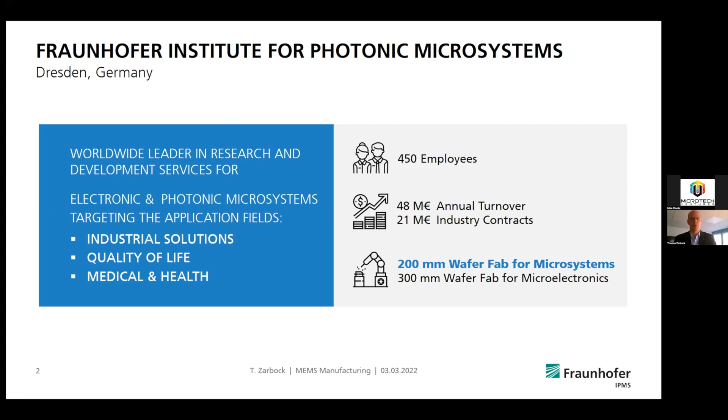Besides a 300 millimeter wafer fab for microelectronics, we do have a 200 millimeter wafer fab for microsystems, specifically for photonic MEMS. This is the focus I'm going to take into my talk today.

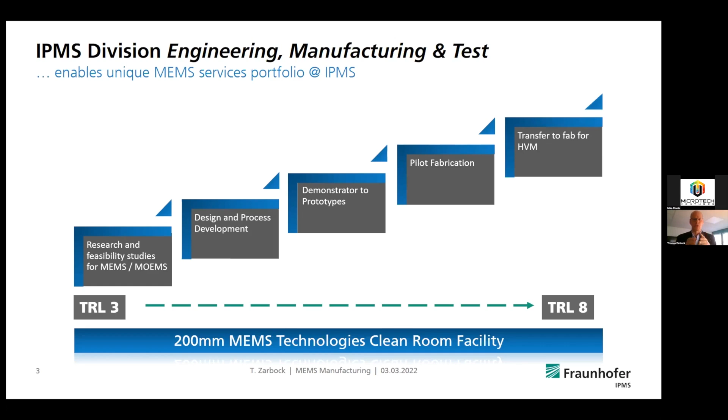Our business model that we are supporting is basically going from TRL level 3 up to 8. So we usually have opportunities to support customers starting from research and feasibility studies, going through design and process development, demonstrator and prototypes, pilot fabrication, and also helping customers transfer to a high volume manufacturing foundry fab, for instance. It's also possible for customers not to start from the left—they can get in somewhere in between if it's feasible. So we are very flexible on that approach.

A very brief overview of our key technology pools. We have surface micromachining that enables us to support micro-mirror arrays and CMUTs. We have bulk micromachining that we use for microspeakers and scanning micromirrors. And we are very strong in MEMS on CMOS integration, enabling us to do, for instance, thermopile arrays or micro-mirror arrays. Here are some nice pictures for impressions.

I'm not going to stick too much to that level here, because yesterday you heard the talk of my colleague Christoph Hohle regarding MEMS-based SLMs, spatial light modulators for holography applications. So, as I said, I'm going more into the manufacturing management perspective today.

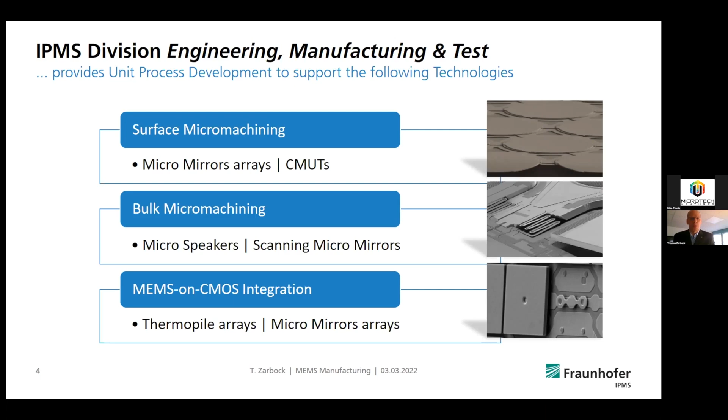This leads me to our clean room. I think Christoph has shown pretty much the same slide yesterday already, so I want to make this very brief. Everyone can read the details afterwards if he or she wants to.

But the focus here is that we are running a low volume and high mix clean room. Importantly, in lithography we are now flexible between i-line and even up to DUV, which is nice for an R&D MEMS facility. We are qualified by ISO 9001, and we also have an integrated MES system that helps us go for KPIs, measure our line performance, and improve it to the benefit of our customers.

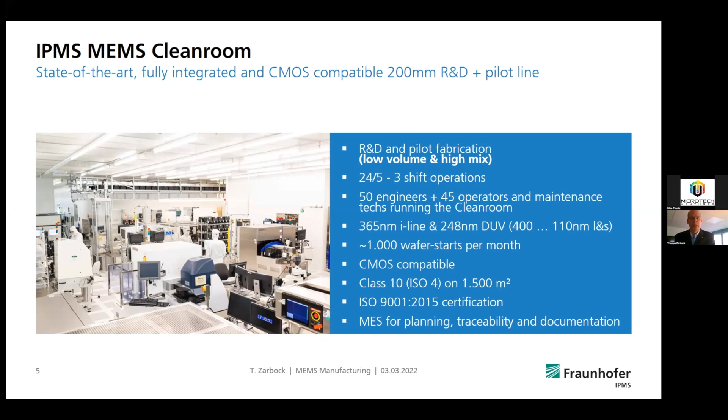Now, before I go into the deep dive of how we manage our clean room, I'd like to give a brief overview of semiconductor fab setups and characteristics. For that, I've chosen typical criteria like the modus operandi of a fab, the number of products in a fab, the number of equipment in a process area, key personnel, and variability—meaning how much variance you have in your processes and fluctuations inside the facility. This comes along with the number of products, and the speed resulting from that, which we call the X factor.

X means X times your theoretical cycle time—if you never had any waiting time in front of tools, if all tools never went down or had issues—and the number of wafer starts per year. These are typical key measures that characterize several fab setups. Talking about these, of course there are so-called high volume and low mix fabs. One example everyone knows would be Intel. So high volume and low mix fabs are characterized...

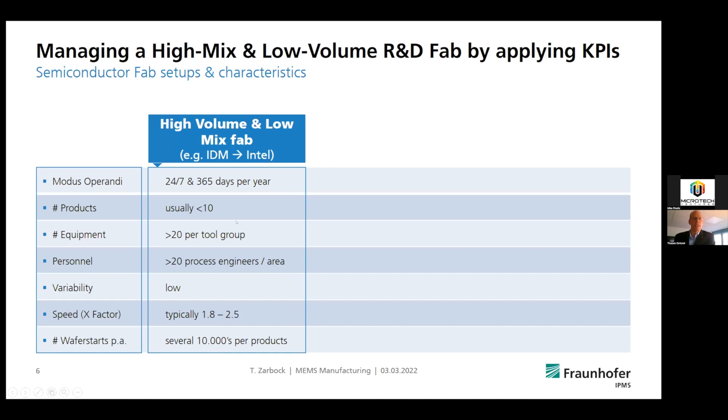They are running basically all through the year. Usually they don't have so many products in their line, maybe below 10. On the other side, they have quite a lot of equipment per tool group. Let's say oxide etchers, maybe 20 and more for that type. They have maybe 20 and more process engineers per area, like for instance, for dry etching.

Their variability out of the smaller number of products is usually low, which is resulting in a very high speed, so short cycle times, typically 1.8 to 2.5 X factor. And of course, for every product they are running, they are doing several 10,000 wafer starts a year, which is a high loading, high volume perspective.

On the other side, there are high volume, high mix fabs, for instance, foundry fabs like GlobalFoundries. Of course, they're also running 24/365. They might have more products in the line, maybe somewhere between 20, 50, and maybe even more. On the tool side, maybe not as many as a high volume fab with low mix. Process engineers, maybe also somewhat smaller number of people per process area.

The variability coming out of the higher product mix might be medium, at a medium level. And the cycle time in terms of the flow factor is maybe somewhere in the range of 2.0 to 3.0, so somewhat slower. And wafer starts wise, they are somewhere with several 1000s per product per year.

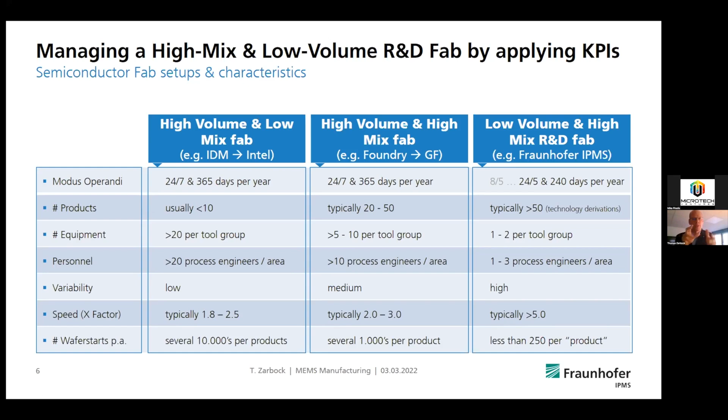And now I would like to deep dive into the right column and show you how we manage to be flexible, consider that cycle time is important and time to market as well, and try to define the sweet spot between the boundary conditions we are facing and still offer a good service to our customers.

The typical approach here is what we call our pyramid, which everybody knows. You have to follow through with cycle time and time to market. You have to offer good quality, which comes with good stability. You have to be flexible. Specifically, we consider flexibility out of our business model, ranging from TRL 3 to 8, and there is a cost perspective as well.

And out of this, you have conflicting goals, so you cannot optimize everything in perfect directions. You will have interactions between the figures, and you have to find the best point that you can serve. To do so, we set up different perspectives, measures and KPIs where we want to make sure that we can somehow handle that.

For instance, for on-time delivery, I will show you how we manage cycle time spread and what that is, and how we do our material flow management.

Process and technology, variability and stability are 2 things that are kind of also interfering. I think Christoph Hohle showed yesterday some insights into the MEMS-based SLMs for holography, what the efforts have to be.

I just took 2 examples here, like for instance deep silicon etching. We have 25 different processes with various differentiations in the depth of the etch step, the width and the profile, resulting in several hundreds of recipes that you have to run at the equipment and handle.

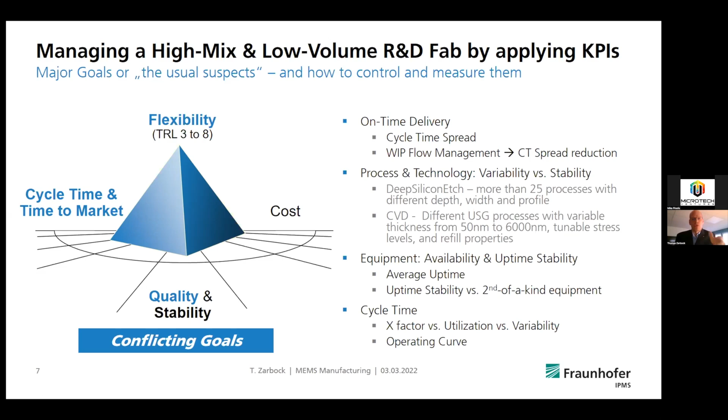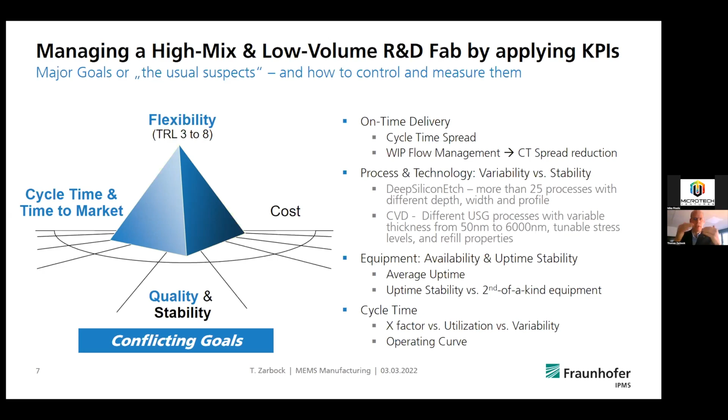And last but not least, when it comes to cycle time, I would like to show you in the end a model that handles the interdependency between your cycle time, the X factor, the utilization of your manufacturing facility, and the variability, the variance. And this is called the operating curve.

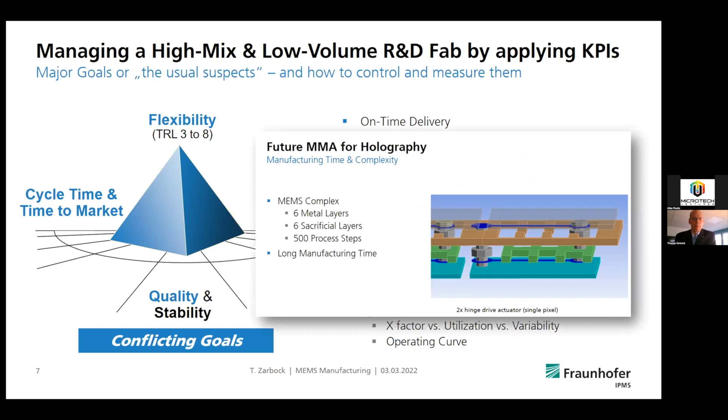So this is again the example from yesterday from my colleague, Mr. Hole, giving us the challenge with these spatial light modulators for holography, having 500 process steps and considerable long manufacturing time. How do we be able to still handle that? First is time to market.

So this is something that everybody might know. If you have a certain number of wafers you are running, you have cycle times. For every lot or wafer you get a cycle time, and you have an average cycle time for all the material, and then you have a distribution of your cycle time. And the distribution ideally is very tight around the average, and it's a normal distribution ideally.

And when you have this stable situation, you can give your customer a so-called on-time delivery. So you are able to say, with a certain probability, I can assume and assure that a lot of material is coming out at this point in time, and I can commit this to a customer. And then, of course, you have to hit this at least at 90%, maybe 95% on-time delivery.

And now the issue is, how do you handle the so-called cycle time spread? How much is your cycle time deviating beyond the 5th percentile and the 95th percentile? This part should be small out of your entire sample size. And this is something you should be able to control and manage.

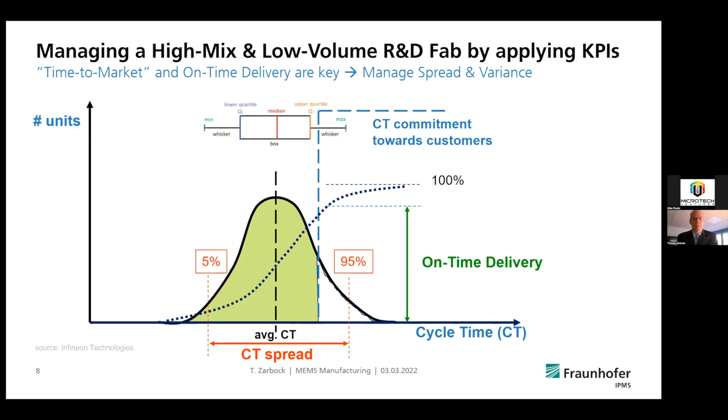How do we do that? We have decided to go for a so-called dispatch rule for our material flow management. So one example here, very general, is you have a process flow from one step to the last step, and you have a target cycle time for each step. And if you accumulate your target cycle time, you have a reference for all your lots and wafers running through the line. And at every point a material is being processed, you can see if it's either before the target cycle time, behind the target cycle time, or just on the target cycle time.

And our dispatch rule says at a certain operation, let's assume this one here, with 2 lots in front, the lot with the higher delay against the target will be handled first. And the idea is that if you do so, in the end you can manage to get your lots out as planned.

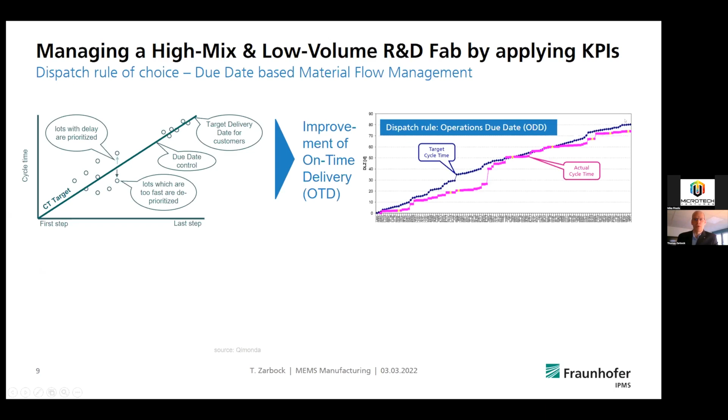Just to give you an example, here is a process flow with 150 process steps for a pressure sensor. You see the blue reference line, the accumulated cycle time across all the steps. And by our dispatch rule, we have been able to get the real lot with the actual cycle time out in time. And this is as it should be.

And the other thing you can do with this approach is you can maybe also define different target cycle times for different products, maybe also for different projects, or maybe also for different customers. And if you are able to steer this, you might then also be able to say, for a certain customer who is willing to pay some extra money for accelerating a process flow, we can then...

This is the same product behind, it's the same pressure sensor lot, it's a different one with the same flow, so to speak. We put it on hot lot priority, and with this, the lot has been able to run at almost 1/3 of the cycle time here, and it was still following very much the target that we put in the system. So this is something we can use to steer as we have planned, and make sure on-time delivery is at a high level.

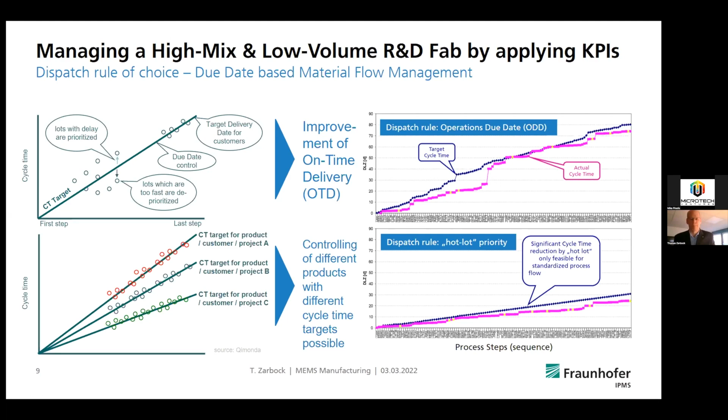So now this is another example I want to show you from previous actual data. You see here a lot that has been traveled across 150 process steps. You see again the target cycle time, planned target cycle time, and the actual cycle time.

So what happened? The lot has been started later in time as planned. There was an issue behind, and we put it on acceleration mode, so hot lot status. And as you see, it was able to pretty much run very fast, being handled first at every tool. And as we have seen, it's covering up its target cycle time. We put it back on normal level.

So here was the acceleration phase with hot lot. And then in the end, it was running at normal speed with the due date based rule. And it was pretty much still coming out as intended. So that's how it should be. This is how material should be coming out of the line. And this was running as intended.

Our issue is here in this example, even though it was better than at the left side, the lot has been started as planned. It was cycling through the line as intended. But then at one point, at one equipment, the equipment was going into an extended tool down. So we had a longer issue, maybe not 1 day, but like 1 month. No available parts to be repaired.

And as I mentioned, when you have only a one-of-a-kind tool situation in your clean room, this is really giving you a headache. And then if you have the tool back up and running, you might even accelerate a lot, but it's not maybe hitting your intended and planned cycle time or target date. And this is of course an issue.

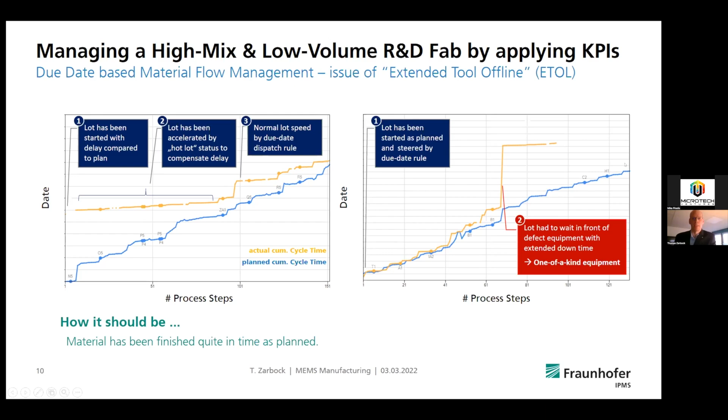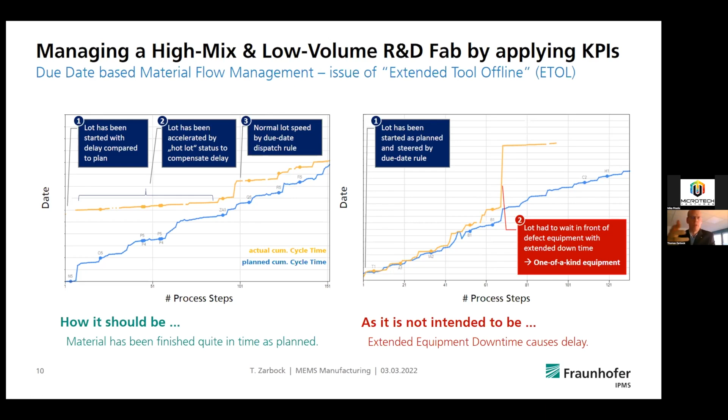And with that, we of course are now striving to tackle that. We do not have the clean room space to put extra tools inside. We are also not having the money as a publicly funded institute. What we are doing now is we are looking into partnerships and potential cooperations to maybe use other partners for backup equipment that we can use and qualify. And in case we have an extended tool offline, we can use these resources.

To measure that, to see if our tools are stable themselves, we have set up a KPI called uptime stability. Usually everyone knows average uptime, and if you measure average uptime, things should be fine. The issue is you need to have stable average uptime. And what we did is we said it's important over a period of time, let's assume 1 month with 20 working days in our case, to see on how many days in these 20 days we have an uptime that is above the planned and needed cycle time uptime.

And we can measure that, and then you can make a fraction out of those two. Let's say, for instance, you have 20 days, and out of these 20 days, on 10 days your uptime in the real world was above the one you are planning with, your uptime stability would be 50%. And the correlation is if you have a bad uptime stability...

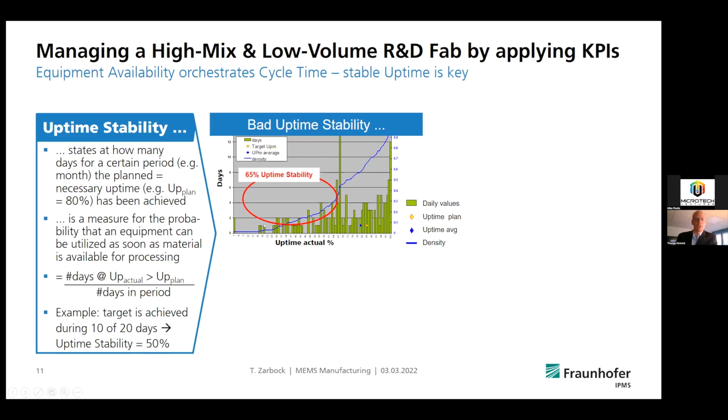So here you see a histogram for many days that have been put into some analysis, uptimes from 1% per day up to 100%. You see that on many days, the uptimes have been deviating above 30%, maybe 50%. Of course, also some of them being in the 90s and above. But the correlation is your target cycle time has been violated on many days within the same period, right?

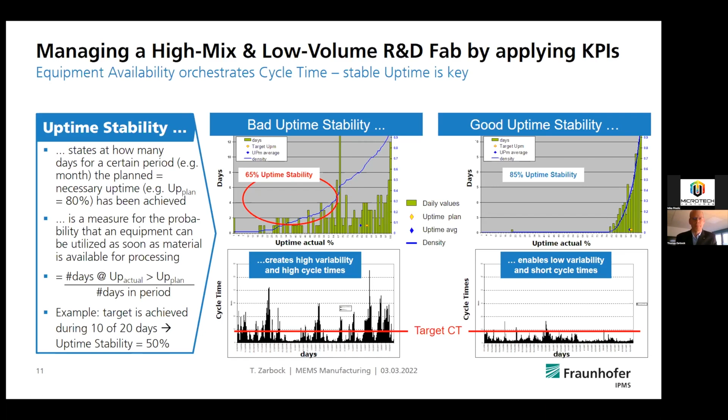The other issue is we had the chance 3 years ago to convert our line from 150 to 200 millimeter, and we took the opportunity to get new equipment, state-of-the-art 200 millimeter equipment. And we knew before that there's a so-called bathtub curve effect.

And the bathtub curve effect says that when you get a new tool, and it might also refer to new devices that you build up, usually in the beginning you have early infant mortality failures that over time, when you analyze and get them fixed, go down, which means your reliability or uptime goes up. And over time, when many years go by, you have wear-out effects where the issues come back up. And the bathtub curve says in the beginning you have issues, then you have a stable period with high availability, high reliability, high uptime, and at the end of the lifetime it's going up again.

And what we have done is we have put measures into our equipment purchase process by putting specifications in place towards the equipment suppliers to really ask them to provide these uptimes and mean time between failures, and have just put this into the contract. And of course, afterwards had the chance to also ask the suppliers to stick to the agreed values.

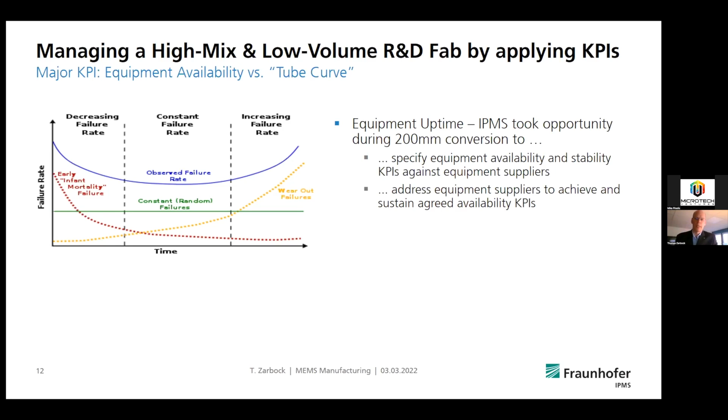Just to give you an example here for some etch equipment. So these are several etch equipment chambers over time, from January 2017 through October 2018. In the beginning, when the tools were being hooked up and started and no material was coming along, it looked quite well. Then stressing the tools with the first material coming along, there have been issues coming up, and it took us many months to fix them together with the supplier.

And let's say after 1.5 years, then we had a level of a stable uptime. Meanwhile, we can say it has been proven to do so. But again, the issues, as I showed before, if there's one extended tool offline, that can come along once in a while, of course. And if you have only one tool, it's still an issue.

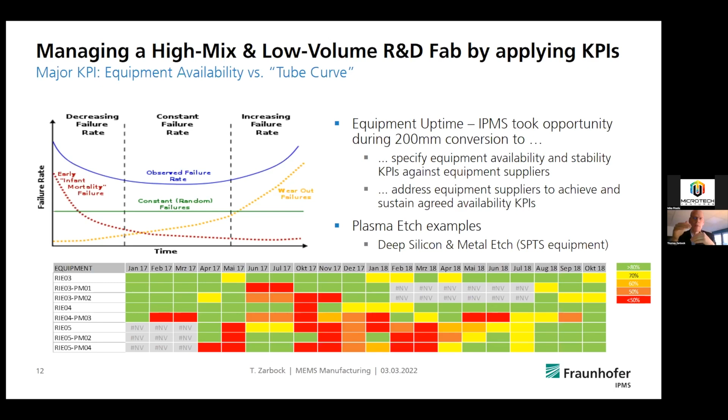So this is again where we try to see what we can do to get things transparent, to understand, to see how we can ask our suppliers to help us with the issue and be able to at least have a certain level of stability that turns into predictable cycle times.

And last but not least, there's a model that I would like to introduce to you where we have the opportunity to understand what is the correlation between cycle time, your fab loading, and how this behaves. We call this model the operating curve. It is showing the dynamic performance of a production system. And the behavior of this correlation is like this.

It says if you have a low utilization, you have a low cycle time. And the higher you put your utilization of your clean room, there will be some point where your cycle time behaves in a highly non-linear fashion. So the increase is very steep, the slope is getting very steep.

And this model gives you the opportunity to see where your operating point is. So you can say, today I'm running the fab at 80% utilization and I can understand what my cycle time is. And of course, depending on what the market is asking, you can see when I increase my utilization, what does it mean for cycle time increase? Or if I want to decrease my cycle time, what do I have to take my utilization back to? This is how this operating point behaves along the curve.

And the curve itself is calculated by this formula. I don't want to get into details here. The important point is the so-called alpha. Alpha is called the coefficient of variability, the variability as we call it. And this variability factor can be correlated to certain fab setups.

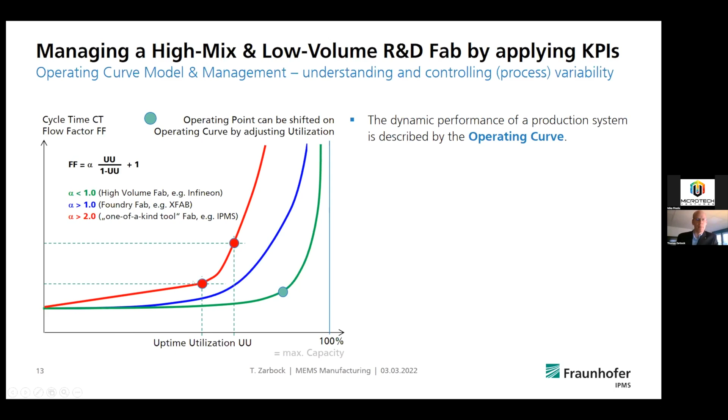And now let's say we have an operating point here, utilization at 50%, and we would like to increase it to maybe 66%. We would then have to accept a cycle time increase that is pretty high. And this is something where, when you have the opportunity to understand that, you can then make good decisions, right?

And now if you're able to decrease your variability by, let's say, increasing the uptime of the tools, having less extended tool offlines, maybe having a platform approach with not too many process derivations, as we have seen for instance from Silterra going for platform approaches, this would help to decrease your variability. So alpha goes down and the curve is flattening.

And with this, you can then either earn the benefit in case you increase your loading. You can put some extra wafers in your facility and you will stick at the same cycle time level. This is from here to here.

Or you can say, I go from here to here, which means I stick with the utilization I have and I earn acceleration in cycle time and time to market. Okay, so that's the model.

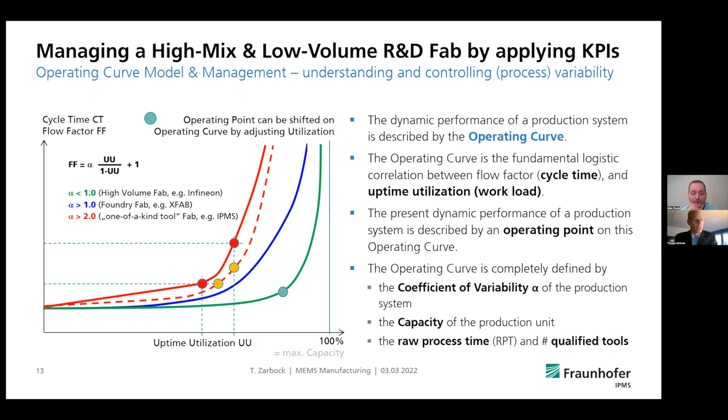There are some more facts and figures right here that you might be able to look into afterwards. I don't want to spend too much time here. This is what the impacts are and how it behaves. So this is something you can look at afterwards because I would like to stick with my 30 minutes.

My conclusion will be basically, what does it help our customers that we are able to control the line based on the models I have shown? One example is regarding time to market. There is an industrial partner that is running with our institute for many years in the CMUT development, and this customer has ordered a hot lot option to accelerate time to market.

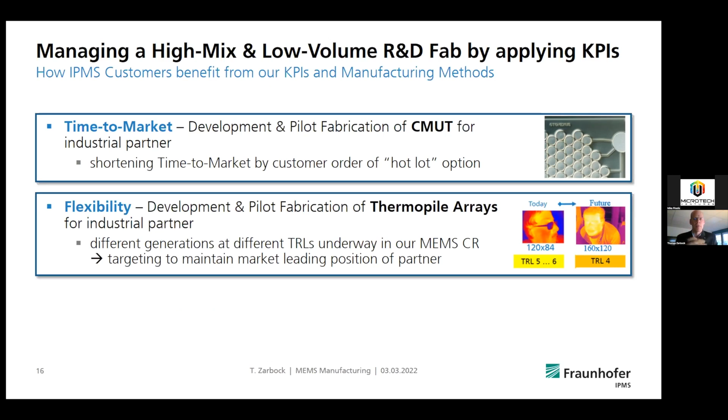Another example is there's a customer going into thermopile array development and pilot fabrication, and he wants to be flexible in terms of having different generations at different TRL levels in our manufacturing facility. And for that, he is striving to keep up with his market leading position. So this is also something we can help with.

And the third example is quality. There's one partner which is using photodiodes that we materialize here, and he has asked for superior quality, and we have been able to deliver that compared to other second source suppliers. So this is also something that we came up with. This is helping to have this customer now for many years.

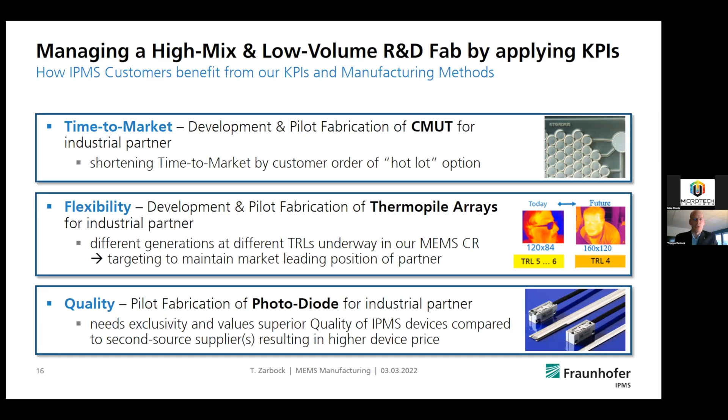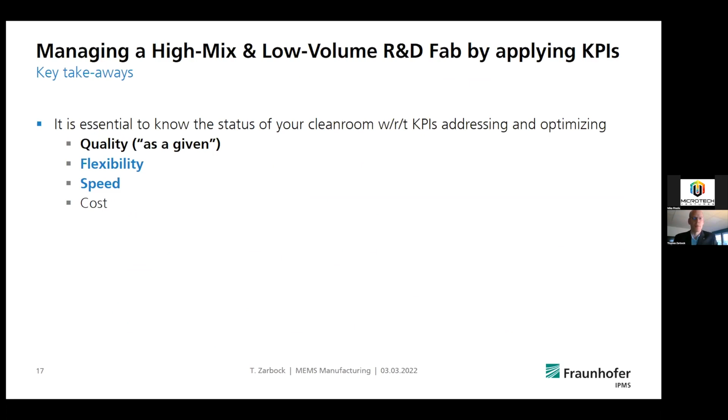So concluding for that, it is essential that you know the status of your clean room when it comes to quality, which is something that is given. You have to be at high quality all the time, so you should not jeopardize there. You need to be flexible. You need to be able to deliver certain speed, cycle time, time to market. And of course, there's also the cost perspective.

Just one example to give you, which has been shown by the CEO of one of our key partners last year in November at the Microfab Summit, Dr. Schieferdecker from Heimann Sensor. He has stated that the cooperation with IPMS, having the different capabilities, was giving this company an advantage of about 6 years time benefit from their other competitors. So we have been able to help them in this cooperation to develop something that is giving them a heads up of 6 years, which I think is quite impressive.

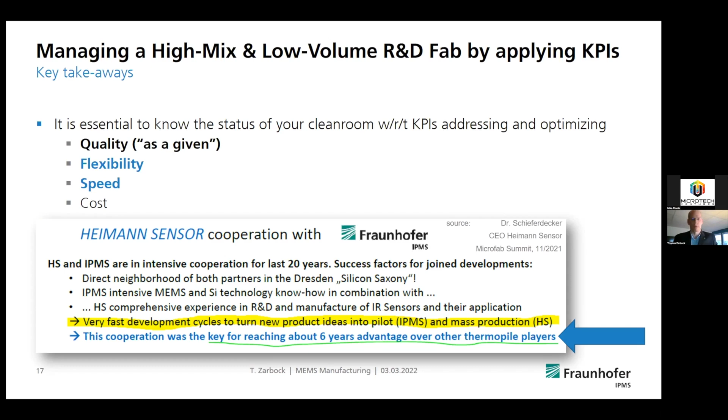Having said that, I'm looking forward to maybe 1 or 2 questions, and thanks for your attention.